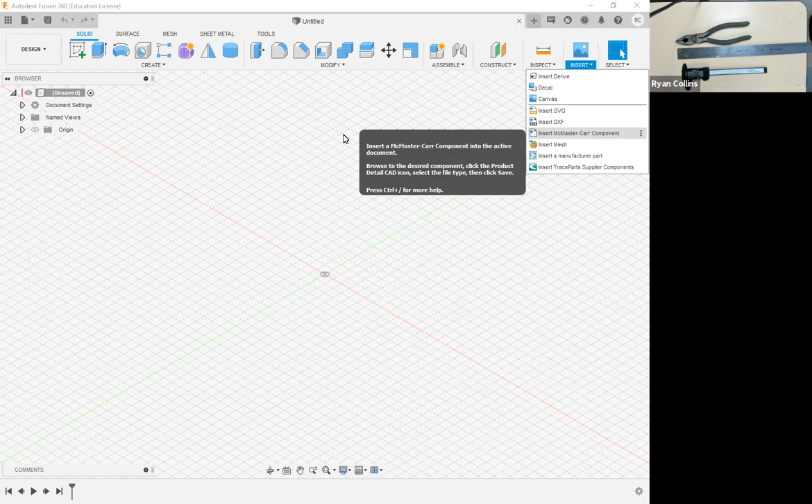So if you needed specialty parts that you are modeling off of this, they'd be here next day if they have it in stock. It's pretty great. This is the exact same layout you get on the website if you opened it on any browser. But within here, I can say, hey, my project, I want to use certain screws. We'll say socket head screws, threading size, inch or metric. I'm going to go metric because the model we're working in is metric.

You can choose your materials, size, and so on. We'll say a standard size for now, M6, standard pitch, sure, a 10mm screw. I'm just going through a few things to see. So you can use your standard selection feature, filters and all that. And who wants to use anything other than stainless steel, because it's shiny and it holds up well.

So what you would do, once you finally find which one you really want to use here, find your part, highlight it, and here there's two separate ones. Just double check, one says stainless, one says still stainless but it's got a black oxide coating. Don't need to know all that stuff specifically, just that there are two options here.

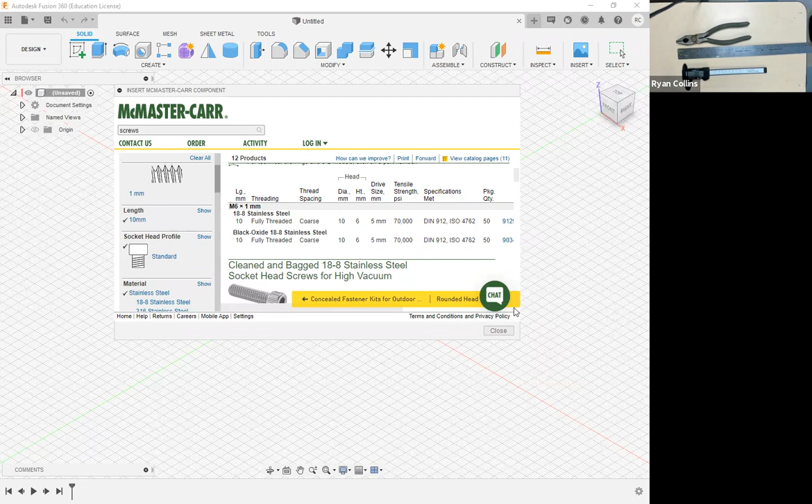Unfortunately the floating window is not as big as it should be, but go over to the hot link, the actual link that is the part number. When you click here, you'll see it brings up a tool thing, and this is where you'd order how much you want. Like, hey, $8 for a pack of 50 sure beats a standard hardware thing.

But at the bottom here, you'll see product detail. Sometimes you actually have to click product detail. In this case, we're going to use not SolidWorks. Scroll down, we're going to use Step. There's other formats, they all work fine.

PDF, not so much. Set. SolidWorks would be a direct word for the actual SolidWorks program. We're going to use the last one, Step. Select there, press download.

Now you don't have to go about modeling hardware itself. If you want to make custom hardware, more power to you. Some components would actually be machined with threads and such, but if you're just doing fastening hardware, there you go.

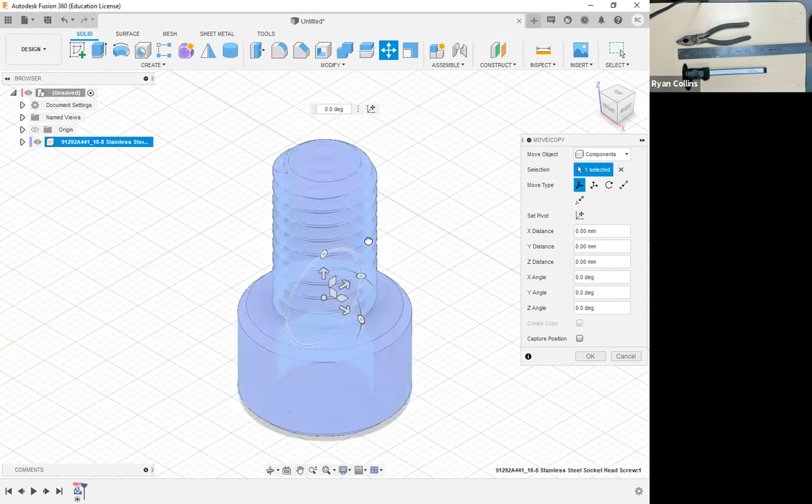In this case, it would come into the model just like if you're bringing in a canvas, and then you can orient it however you need. If you wanted to have this oriented to the side, sure, we'll do 90 degrees. If you need to rotate it, whatever, I wanted that -90 so it's right in front of my face.

It'll come in as a new object. You have your standard options here. If you want to have it lock in place right there, sure, capture position, great, click OK.

Now that is a full modeled component, not a mesh. This is a solid. So if you wanted to play with this model and actually modify it, make it your own or something, more power to you. But now this is a direct solid model within your project.

And it comes in as a separate component, so you can snap it to locations with a joint tool. You can manually bring it in place too, but if you just wanted to plop it in somewhere, there you go. So that's a really effective way of not having to model everything, but also being able to just drop in parts that you can actually order if you needed to.

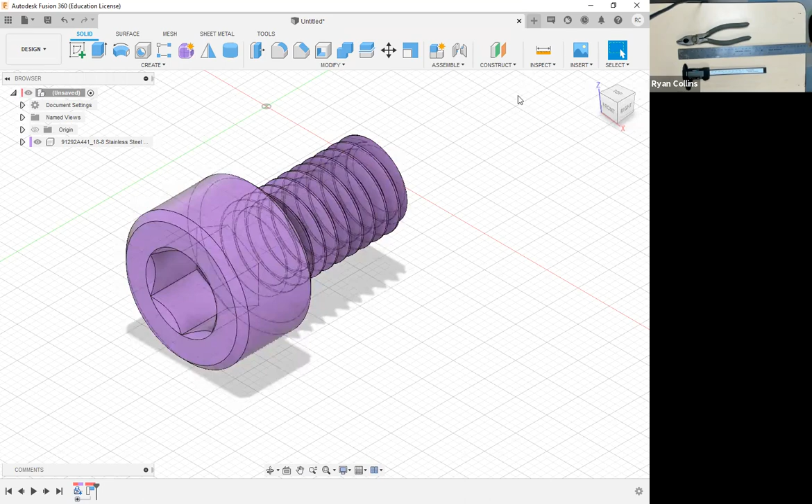All right, so super good there. We'll swing back to that as we get to the rest of the actual project. Oh, nah, don't want to save. There we go. Okay, so the one we're going to use tonight is, I'm going to model a pair of pliers.

So where do you start? Well, where do you start with anything? Now you're trying to model something that's more complex, not quite as standard. Again, I like to use just a bounding box. I just like to create a sketch that's as big as my largest dimensions, so it just kind of plops things into place for me. I don't have to really deal with it, or at least it gives me a frame of reference. That's what it really comes down to.

So first things first though, don't forget, save your project. That way you don't accidentally forget what you're doing.

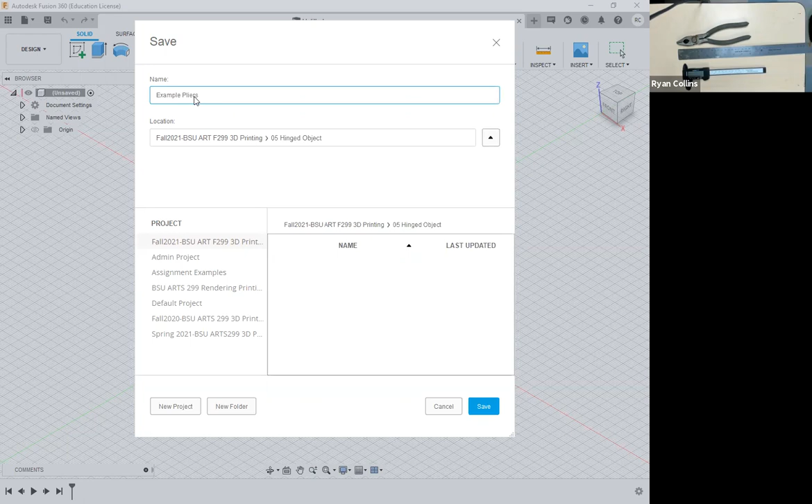All right, so let me start a sketch. Flip floppity flip right down onto the bottom. I'll start with a center point rectangle. Tab over, 210 by, what is the largest section here? Oops, wrong way. Roughly 55. Cool.

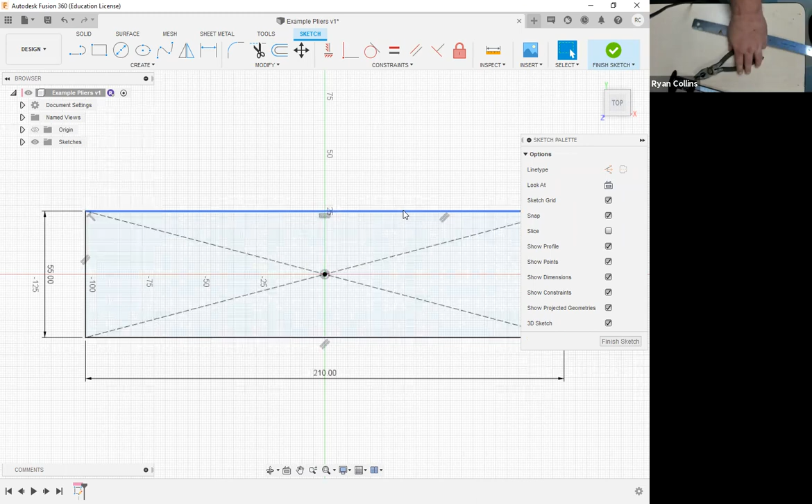Okay, now I'm going to start that as a construction line. I should have started that way. Press X after highlighting. Great.

Now, before I move on, I do want to throw down some other general reference points just to help myself out in the later model. One of those is, now my rectangle here is centered exactly in the center. It is not centered around the joint or anything, so I'm going to just place some points to help myself out later. So right there, about in the center is, yeah, right on about 50 millimeters. Again, good part about using imported tools, they're probably made with metric sizes, so hey, metric rule works well.

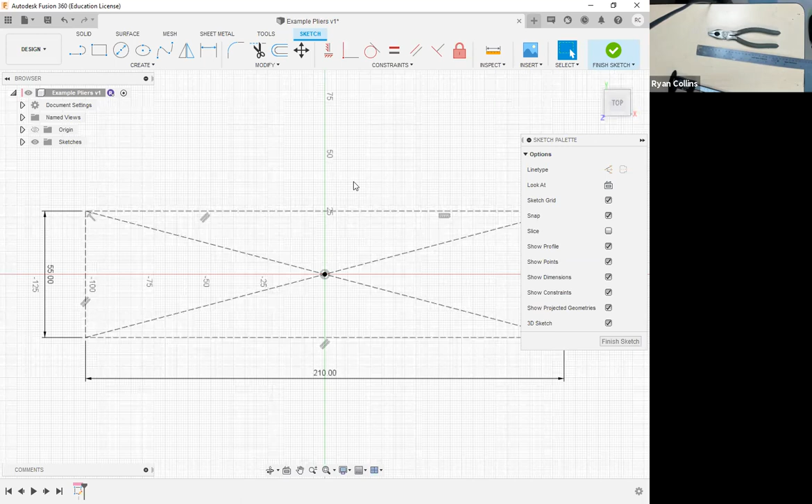All right, so I'm going to start, and I'm going to work from right to left because brain. Now, I didn't actually measure where that's going to be placed. I am going to measure, however, how big is that inner circle there. That looks to be about 12 millimeters. Yeah, so I'm going to just cite that as 12. But like I said, that circle is actually, what did I say, 50? It actually looks like it's actually closer to 48. Okay, so how you can put in reference dimensions is...

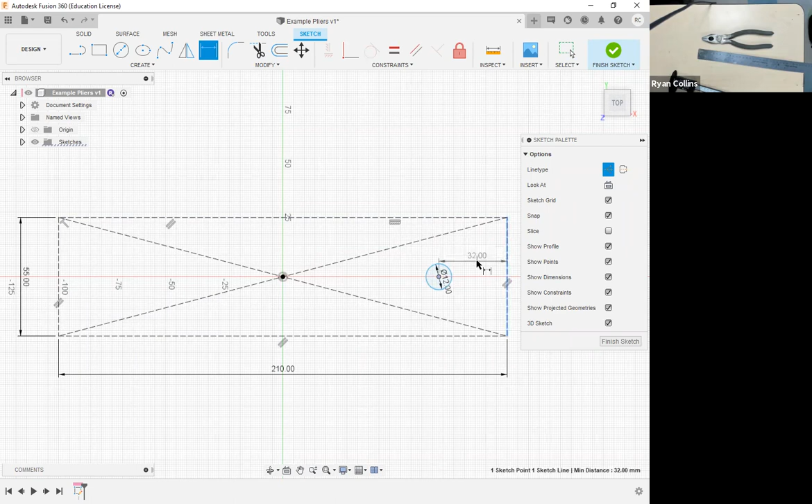In your sketch dimension. Great. This is what you'd usually use for replacing sketches or replacing dimensions, things like that. You can also use your sketch dimension to actually locate stuff within your drawing. So let me pull down to here. All right, so using the dimension tool, sketch dimension, click there or just press D. If I click in the center of the circle that I just drew, and then to the side here, you see a little reference line comes up.

Click there. This is how I can actually put things in place by dimensions rather than having to measure things out and put lines and all that first. So that was 32 millimeters roughly from the center to the end of my pliers. So type in 32, that snaps that over into place. Super easy to work with that way, just to give yourself some reference points. So I'm going to turn that into a construction line as well, highlight the circle, press X. There we go. Okay, those are my rough things I'm going to work with.

I just wanted a general size, and then where is the center of my pair of pliers. From there, I'm going to start a new sketch, so finish this one, go ahead and label it 'pliers reference,' that works for me.

Great, okay, now let's start working on the rest of this stuff. So like I said, one of the things you want to do is, well, not going to worry about trying to model the whole thing. I'm going to model half of this, and then I'm going to use the mirror tool to flip it. There's no reason to make this harder for yourself.

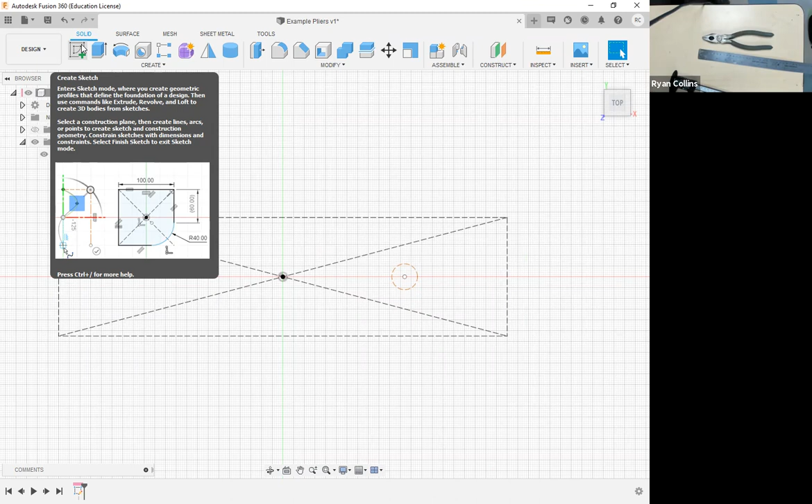So let's start sketching this all out. Now, yes, you could build this with a selection of other parts, random ones there, one second. All right, so I got my center point, got my general reference size.

Great, so let's start measuring this stuff out. You can use calipers if you want, you can use measuring points. Something like this, I like to start with that central location, I like to start with that center hinge. Use my calipers, measure out the round thingy. That is measuring out to, we'll call that 24 millimeters. Great, all right.

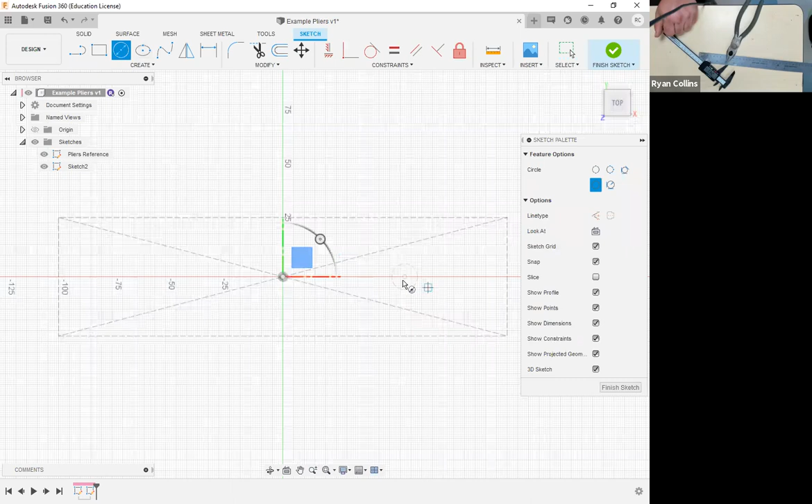So let's start the sketch on the bottom, center circle, right smack in the middle of there. That was 24, great, so that's the outside. How large is that inside? Well, I already measured that, but we'll do it again. It's hard to see that. That was 12, 14, what did I say? I don't remember. No, there, it was 12. Great, okay.

So one of the things, how do you start defining any of this? How do you start defining these pliers, this wedge, all of this? Well, just start drawing. Start really basically with anything.

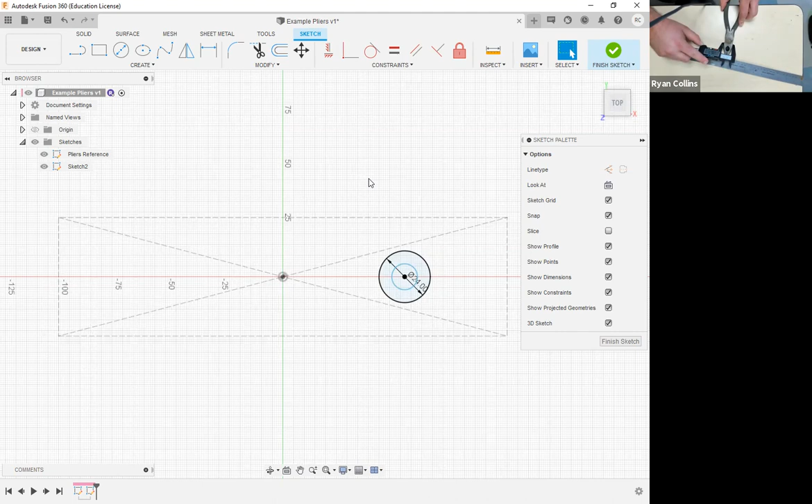Start from a point. For one, I know that the pliers don't stop at that circle. They're actually a little bit larger. So from the outside there, that is 26.8, probably more like 27 millimeters.

So from there, I'm going to start a center point rectangle. I am going to do this as a construction, but I know I want that top to be 27 wide. And then I'm just going to snap this to the side over there.

Now for right now, that sketch underneath is kind of starting to get a little visually confusing, so I'm just going to hide that for the moment. I already got my center point, and right now I'm working on this stuff. So that's how tall that's going to be. And we're going to cut these notches and such in a moment, but for now, let's go ahead and work on the rest.

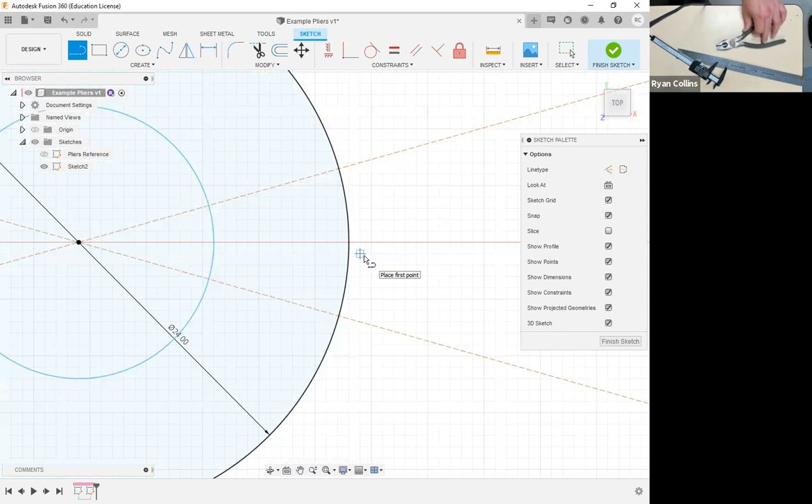So from here, I'm going to start just a line from the edge. So let me zoom in. I'm going to start actually making half of the pliers here. So I'm going to bring cursor to the center and just start a line going straight to the end here.

Great, center is selected. How tall is one of these spots here? That is about 3.4. All right, so now is when you got to decide which side am I building. Really doesn't matter, so we'll say we're going to build this upper one.

So moving from there, all right, that is 3.4. I can type in 3.4 and then I just set my angle.

Now this is sometimes the tricky stuff. Well, okay, how do I figure out where that point is? There's definitely a wedge there or something. Now, if you had a protractor so you could easily figure out that angle, and I don't have one right now, so instead what I'm going to do is kind of draw an imaginary line to where that point is.

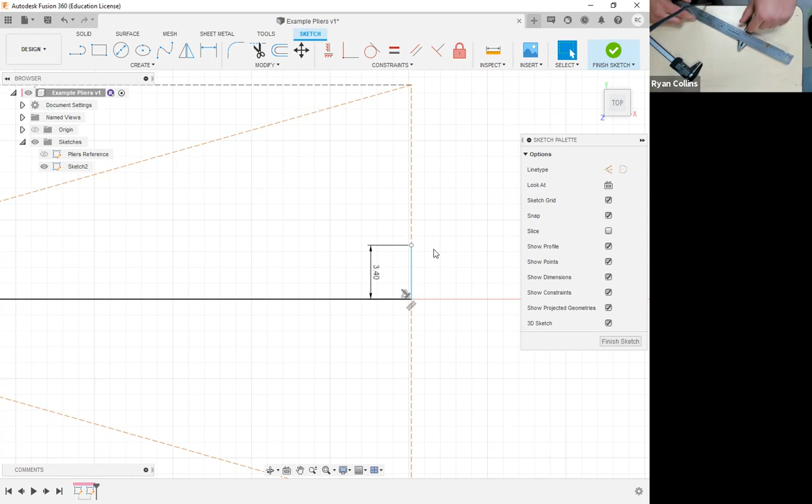Or look down, or if you have something that's a little more pointed, you can still work with it that way, and kind of just figure out where in the center that is, which really it's about in the center of the plier cutter there. So let's measure to that, roughly in the center. That looks to be about, I don't know, 27, 28, sure.

All right, so this would be where I could draw a line to, right in the center. I think it might be easier to just draw backwards, meaning I'm going to start a construction line, draw back 28 millimeters, and put it right there. So now I just have a point right there. Now I could have probably done this with the dimension tool, but I just drew a line there. I can always delete it later, but for now, we're going to do that.

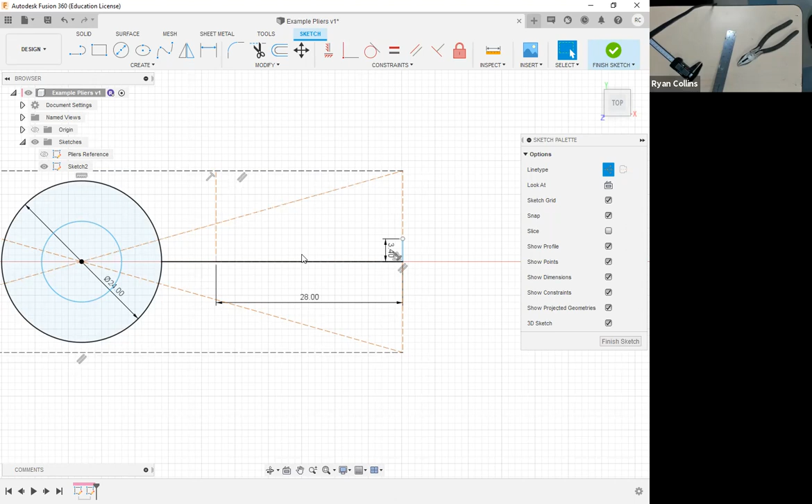Still on construction line, I'm going to go from that point up to the top. There we go. Now I can go back and delete. If you have multiple overlapping lines, remember you can delete them by first mousing over and then holding down the selection key, so left click. Now it brings up this little checkbox. Now I can mouse over which one it is and select that one, then delete it. Really, it's just an easier way to work sometimes on that.

All right, get out of construction lines, straight line. There we go, just so I can make that little notch there. Now I'm going to draw straight back. Makes it easy enough.

I'm going to draw to the center there for now, or looks like I should just might as well go ahead and draw backwards a bit. I'm just going to pick a spot. Doesn't matter at the moment because I'm going to figure out how to cut that up here in a bit.

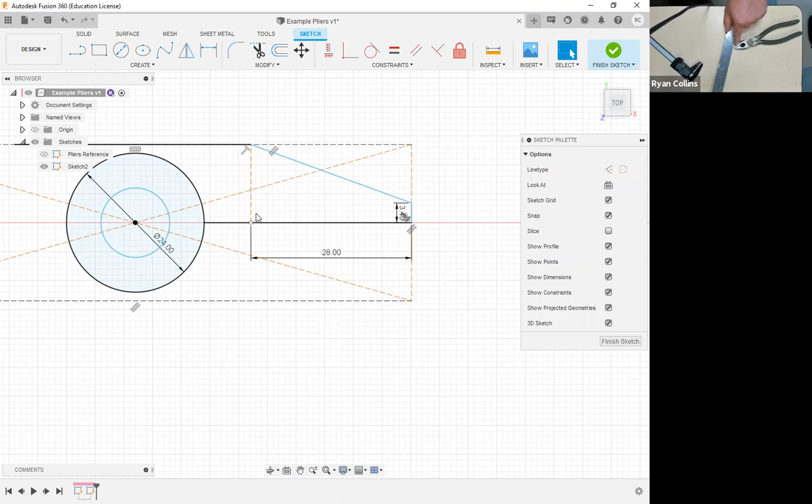So I got that part. Now I need to really decide some of these other areas. Now, I'm not going to bother with the notches just yet. Right now, I'm just trying to focus on getting this thing actually modeled out. So we can build out the notch here later, we can build out the teeth later. These are details. I'm trying to get the major parts here.

So the next thing is I want to make this notch. The reason this notch even exists is because when you open and close, if this didn't have the notch there, the pliers wouldn't be able to open as much. You see how it opens and closes there. So that means I need to figure out how to do that.

Honestly, this would be the kind of thing where you could figure out angles and all that, or you could cheat and just say, let me measure the size there. That looks about 10 millimeters. Cool.

So the size there is 10. Let's draw a construction line from the center here, straight up. And if half of 10 is 5, repeat a construction line right over, and I want that to be 5. Great. Same, I want that one to be 10. Great. Now from my center, oops, that wasn't supposed to be a construction line.

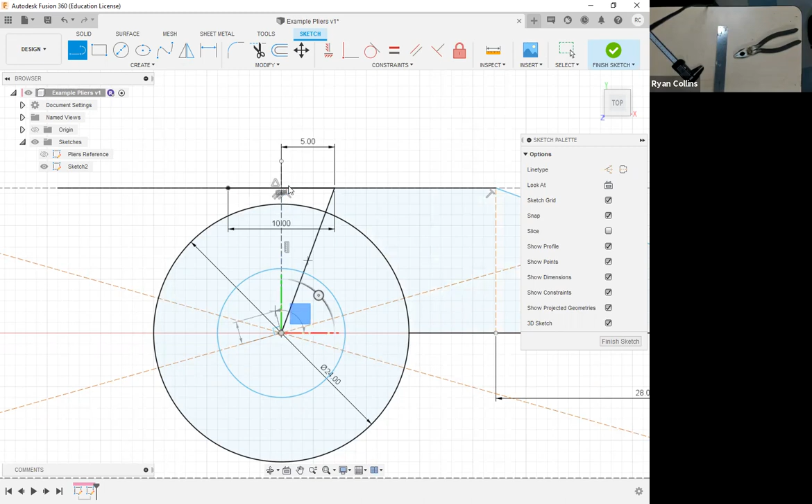So now for my center, I can just draw over to those points. Keep that line. So now when I zoom out and I mouse over that profile, you can see I'm easily building out that section there.

So yes, if you have specific measuring tools, of course you can make more accurate measurements, but we're also working with what we have. We have okay-ish calipers and decent rulers. That's what we're going to work with.

There's some trimming work to be done here in a bit, that's all right. But now, since I got to that point, how far is that little notch there? Looks like it's about... now one thing on here, if you note, it is a little flat, so it actually comes to, you've got a nice, like what would probably be done with a fillet or a round there, but here you got this little point.

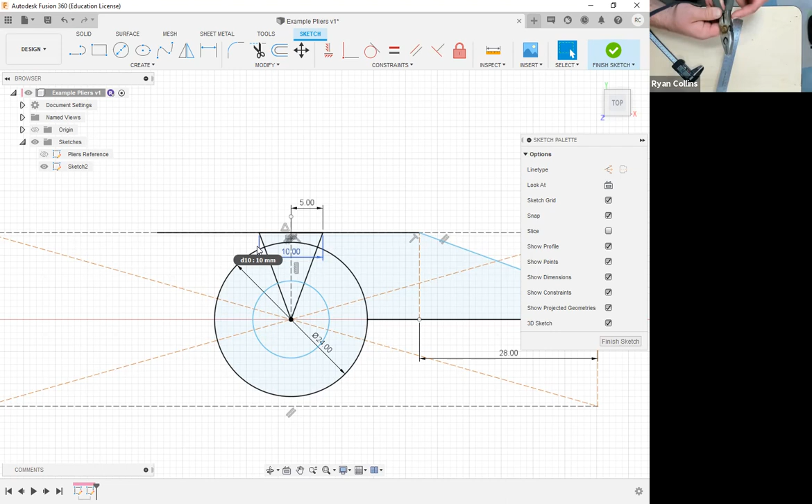So I'm going to measure to that, and let's call that 10 millimeters again. Okay. From there over 10. Match up.

Great, now this is going to start getting confusing in here, so I do want to select and hold, and I want to get rid of some lines here just because this is getting a little busy. Select that one and let's delete that one. That's fine, this is a construction line. That's okay.

That one works, that can stay. I'll rebuild this line here. I was just throwing a line in again real quick. Okay, cool.

All right, now again, how do I kind of build this handle? One thing to remember though, I just motioned to this handle, but I'm building the top plier. Don't forget, they cross. So if you're building scissors or anything like that, if you're making it left and right instead of top and bottom, and you're building the left one, make sure you build the right handle. The parts cross, so double check that.

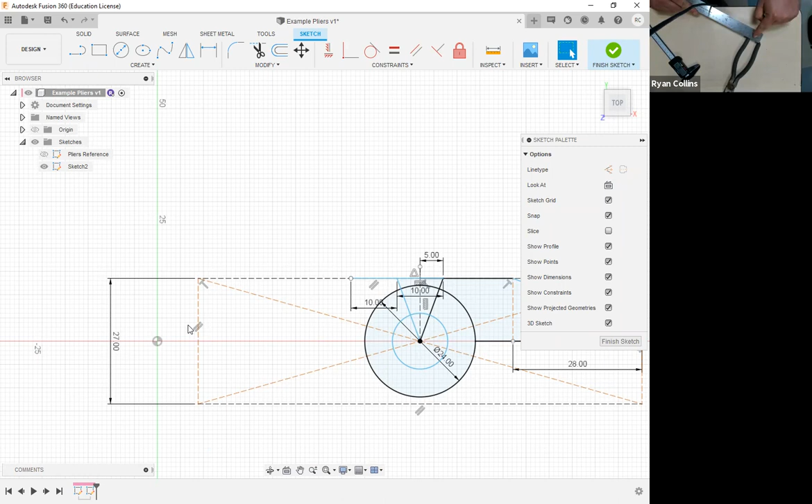Easy way to start on something that is much more organic rather than something with hard lines I can really measure - well, let's first establish how far apart are these. That looks to be about 20 millimeters apart. Great, so that means that my handle should start 10 millimeters from my center line.

So now I'm going to unhide the first sketch, and let's do another construction line. Remember, I'm going down, so 10 millimeters down. Snap to there. Great, got a point. Okay, that all starts to come out.

And this is where I already realized I messed up. I modeled the top half of that part. That should have been down in the bottom. But that is a pretty easy fix.

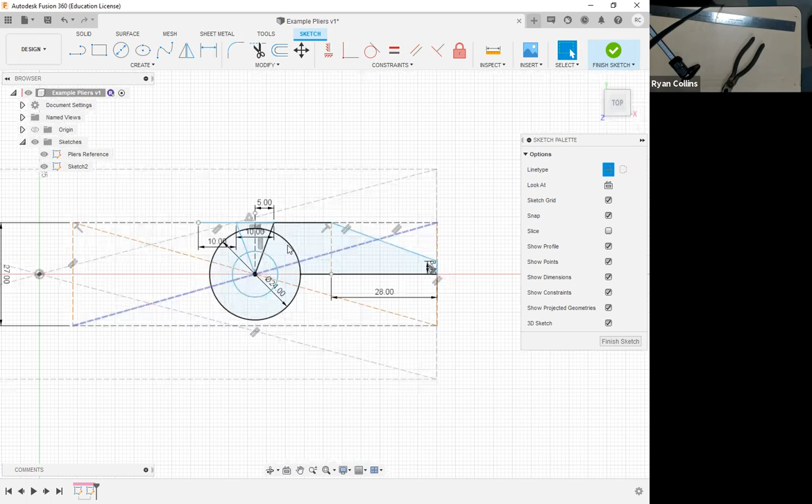What I can do is just extend or replace this line here. So I select there, another line, just make sure it goes through. And anytime you're getting close to something - or better yet, I realize this is a construction line, I'll change it afterwards.

If I'm trying to get that to run as an extension of an existing line, you can see as I move around here, it does want to snap too, but just to ensure that it does, if you mouse over that center point, a shared point, and then continue downward, it tends to want to snap into that location much more readily.

Or of course, if you snap to there and just take note that it is, in fact, 110.3 degrees, well, that makes it easy. Lock that in. Oops. Delete one of those. I have to do this. There we go. And then just snap down.

There we are. So this is just fixing what I messed up there. All right, there we go. I can start to mirror some of this stuff later when I go to work on this. That's fine, okay.

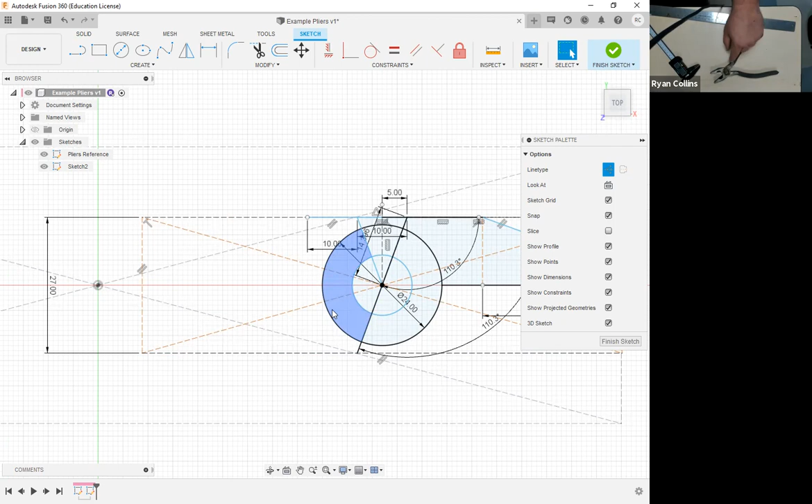So now I've got what will be... getting confused on which way I'm turning here. All right, so I've got a starting point from the top here that's going to work downward. I've got to model this out, and it's got to come to here.

So this is definitely some of those areas where you're going to kind of have to fudge some of the details a little bit, because it's really difficult to get something like this exactly accurate with the tools we have. So the main thing is you're trying to get the details you can accurate. The rest, yeah, get it to work.

All right, so this would be where we'd start a fit point spline right after I build the base on here too. So I'm going to continue that line out from the back.

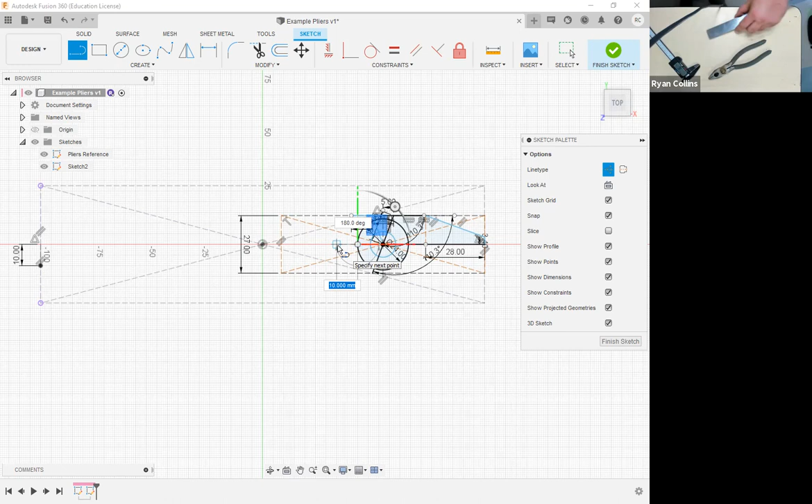From that center hub, that's about 15 millimeters. Snap that right to there. Great, I think that actually did a construction line again. There we are, okay, so I needed it to sweep upwards and then down.

Now, you can get a pretty decent estimate of these measurements here by just figuring, all right, I know that from the back of the pliers to here is 140. So let's say right about there, which is 60 from the back, and obviously that would be 80 from the front. Had the math right real quick.

So right about there, how wide is that? It's definitely beneficial if you actually put a couple of little marks if you can. So great, that's what I'm actually trying to measure to. And in between there, yeah, it's about 30 millimeters. Great.

So construction line from the back to 60. And then again, what did I just say? That's 30, so 15. There we go. So you start drawing some of this stuff out just to give yourself some reference points. Okay, so now I have a couple of reference points.

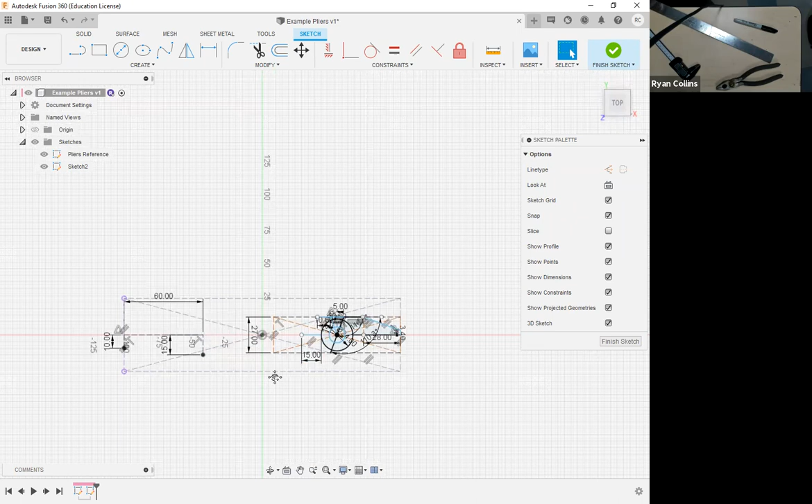Now I can really start to sketch this out. So select fit point spline. I start from the back here, which is here at the back of the pliers. I'm going to draw up to that point, and I'm going to draw down to that point.

I can adjust these. Again, this part is where it's going to be not as exact, but it's going to be pretty darn close. So there we are, great. That's pretty good to where I want it to be. Now the end is going to end up square, and that's fine, I'm going to fix that later. But that'll work, okay, great.

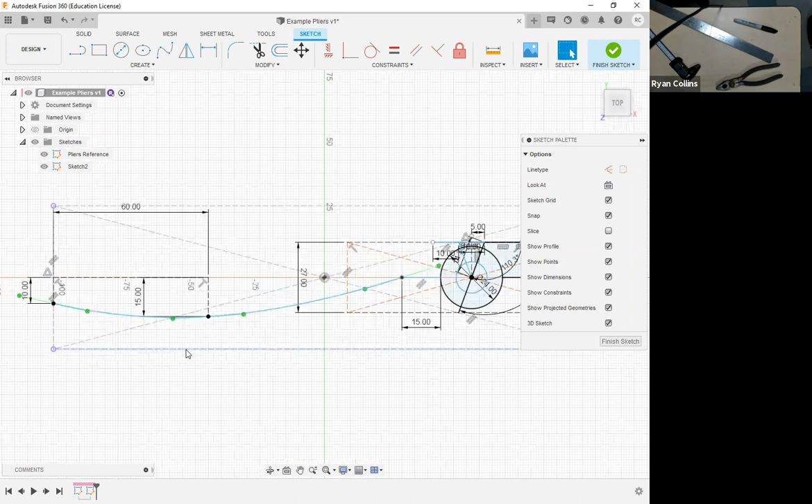Now I can decide, well, how thick is this? Yes, with the handle on there, that's all right. That handle, it looks to be about 12.5. Okay, now I can use the offset tool.

I don't necessarily want that other part, but I can trim it off afterwards. That is negative 12.5 because I'm going the other direction. Matches up pretty well to the end of my box that I drew out. Yeah, that works, good, okay.

Now I can complete this line over here, a straight line from the back, straight over to where it intersects with my offset line. There we are, hit enter. Now I can trim off those little bits.

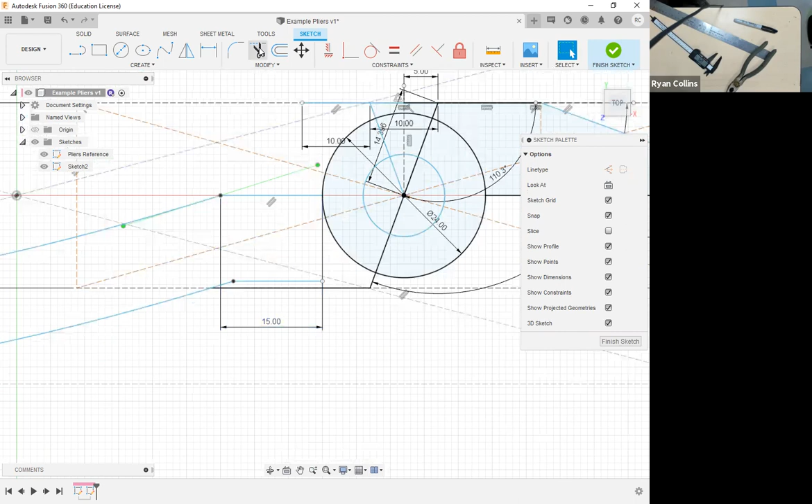Yes, I'm going to get a warning. Yes, you messed with the constraints, blah, blah, blah, blah, blah.

All right, and then back here, this is where I could probably pretty easily create a circle. So what I'm going to do is create a circled end and then modify that. So how to do that? Well, how do you draw between two ends? All right, well, we did that before, but I want it to stop at the end of this box. So what I'm going to use is, under circle, a 3-point circle.

So this is where I can, instead of starting at these points or anything, why is it—it keeps stopping. There we are. I'm not sure what's going on here. Cursor keeps stopping, all right. Hold on a moment here. When in doubt, save. Just hit escape.

All right. Let's try that again. Not sure why it was doing that, but maybe I had too much data going. Still doing it, that is super weird. All right, well, let's try something. Often in doubt, stuff keeps doing just what you know perfectly well it's not supposed to be doing that. Pause.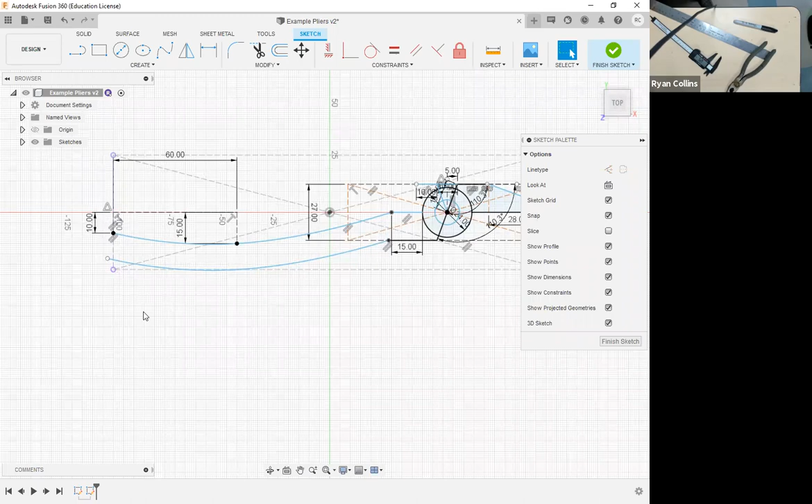Okay, so tried saving and restarting. Let's see where that gets us. So try this once more. Circle, 3-point circle. Hey, it's actually working.

So what I'm trying to do is find a point between these points here. Now, if you can't find something, that's all right. So what I'm going to do is, before I make the 3-point circle, start a line, press X for a construction line, just draw between these 2 points here. Just let the snap do what it wants to, or what it needs to. Now I have a line here in the center, or a line between these 2 points.

So now when I go to create a 3-point circle, starting here, it's going to be able to find my center point between there. So that's all. Then I can draw out from there, find a point there, and I'll find a point here. So I'm just going to try to make these match. There we are. All right, that didn't work as well.

So Control Z. Other option would be trying out the tangent circles. These basically do the same thing, only they work on tangents. So let's try this. Draw a circle from here, circle to there. Come on, catch up. That's not wanting to let me do it at all. Fine.

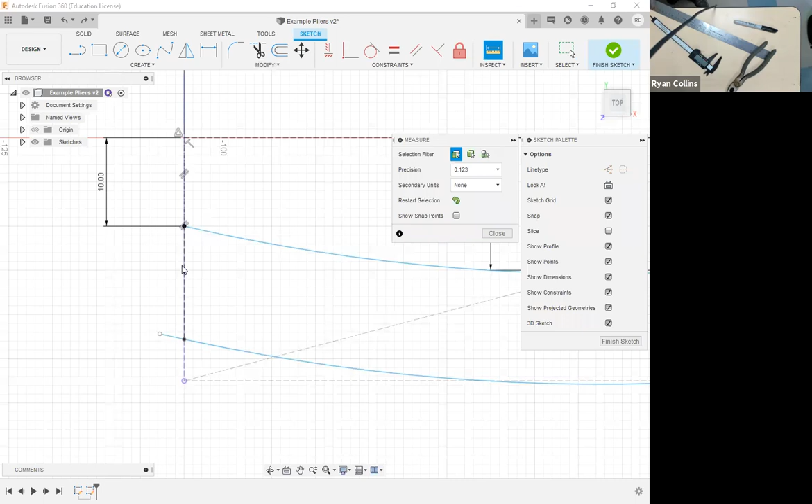Then the last step is measure this. All right, how wide is this? Oops. That should be 12.1, I believe, but let me double check again. I don't recall. 12.8. All right.

So what I'm going to do then, I'm going to create a circle somewhere in the middle, but that needs to be 12.8. Now what I can do is use my constraints to snap this in place. So first I'm going to use the tangent constraint. There to there. That's going to snap the circle over there. Use other constraint there to there.

To my fit point spline. It's not selecting it. Not sure why. Right. Okay, now it's not doing that. Fine. You know what last ditch is? We delete that.

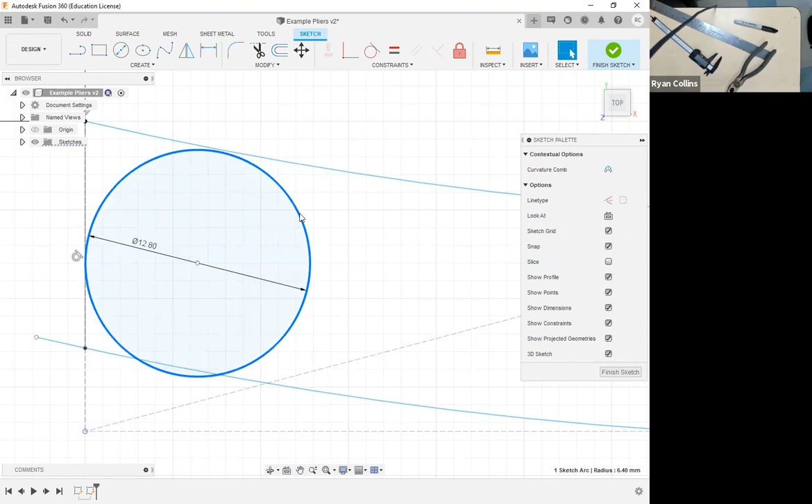I will close my sketch, change that construction line to a regular line, and instead then we'll just use, nope, not offset, the fillet tool. There we go. That makes it work.

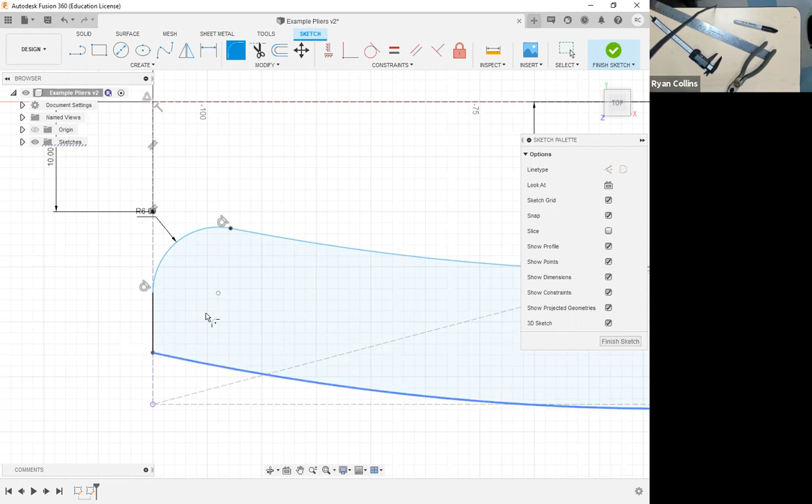So we know that is 12.8, so let's say 12, so let's make that a 6. All right. Again, repeat fillet there to there. Oops. Because it has this little tail, make sure you chop off the little tail. There we go. Now fillet there to there. Same, 6. Pretty darn close.

There you go. So, a couple of tools you tried, they don't work, or they're not working right. Try something else. Okay. Now I have a handle, and I have the head of my pliers.

All right. Now, I know all these dimensions are pretty confusing, but let's work with what we got. Finish sketch. I'm going to hide the first one. We'll just do pliers, side A. Okay.

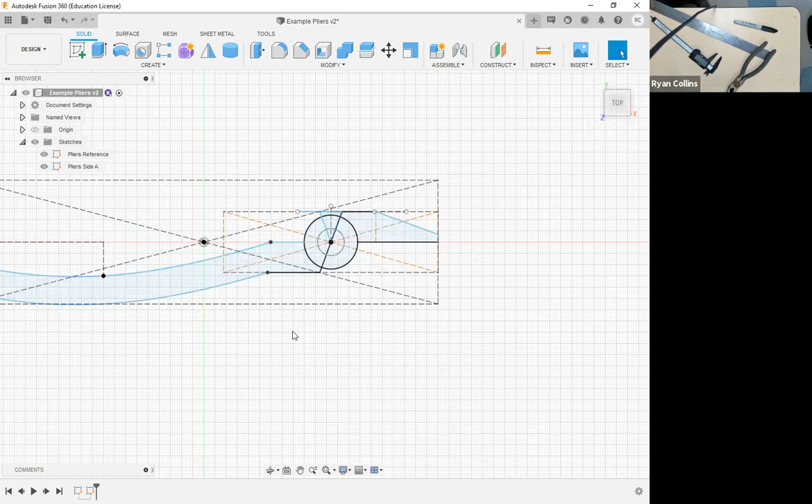Now we get into extrusions and such, our old friend. All right, so how thick is this whole thing? That is 12 millimeters thick. Great. So what we need to do, extrude.

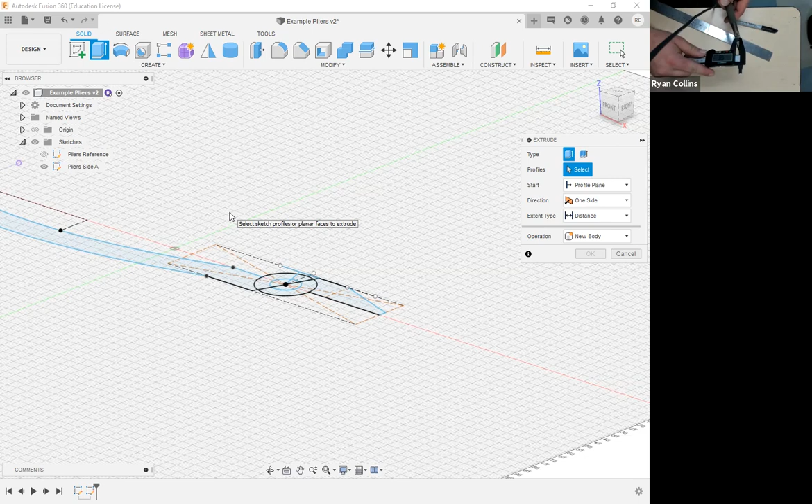Now one thing here, take special note, these pliers, the internal pin is actually part of one of the sides. The other thing is, look between the sides here. The center here isn't a full extrusion. It actually only goes to half. So while the pliers themselves are a full 12 millimeters thick, this center hub here is actually only 6, but it's 6 on either side, and it's 6 on opposing sides.

So the easiest way to do this would be to do multiple extrusions and then join them together. So what I'm going to do is extrude one side of the head, one side of the handle, and then I'll extrude the center here.

So I'm going to select the handle and the head first. Now, just to make things easier, I want to keep everything right on the XY plane here. So it'll be split. Well, if I extruded this to 12, it's all going to go up one side. And that's just going to be more difficult for me.

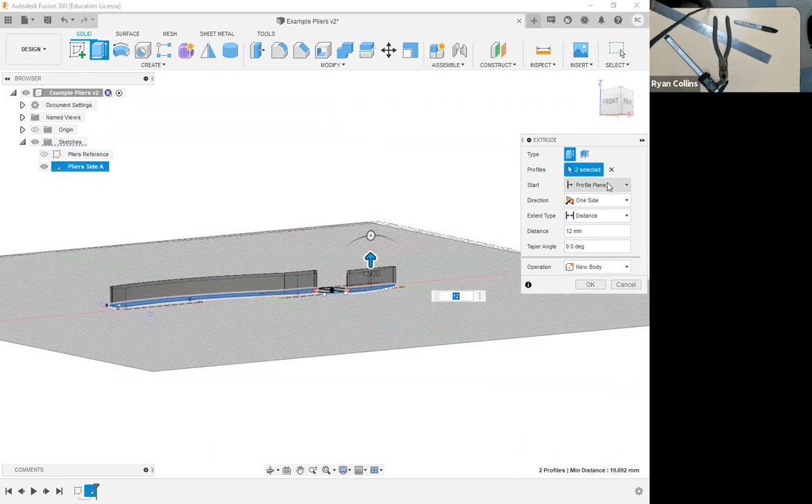So instead what I'm going to do is choose direction on the toolbox into symmetric. And you have 2 options here. Now of course, right now, the default is it's doing symmetric on both sides. I want that to be the whole length. So you got 2 options. If this were leaving it on half length, you'd press 6, and that way it's going 6 in one direction, 6 in the other. Or you choose the other measurement selection, whole, and I can put in 12 millimeters for the actual overall, and it'll be 6 on either side. Just a couple of simple, easy ways to work.

Okay, great. And operation, I'm going to immediately drop this into a new component. Okay.

Now all my center stuff is gone, all my sketches are gone, but I still need that center. Let me open up side A. I'm going to label this piece plier side A.

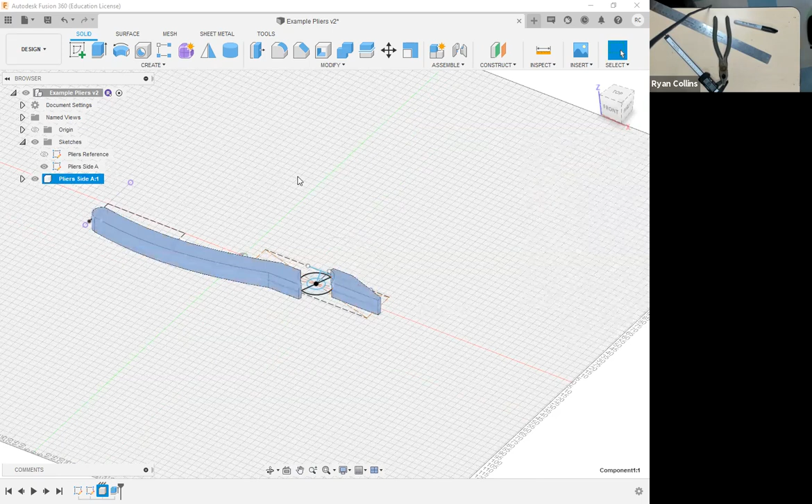So now I'm just going to shift my view so that it's by color instead of appearance. Now I'll go back and extrude again. Which side is this? It has the half on the top. I'm going to go in, select that center ring. You got to pick a few parts here.

There we go. I can either just press in 6 and it'll go up to the top, or I could select again, extent type to object, and just select the top of one of these, and it'll snap to that too. Now I'm going to leave this internal piece hollow, just because I want to actually drop in a screw here, for example.

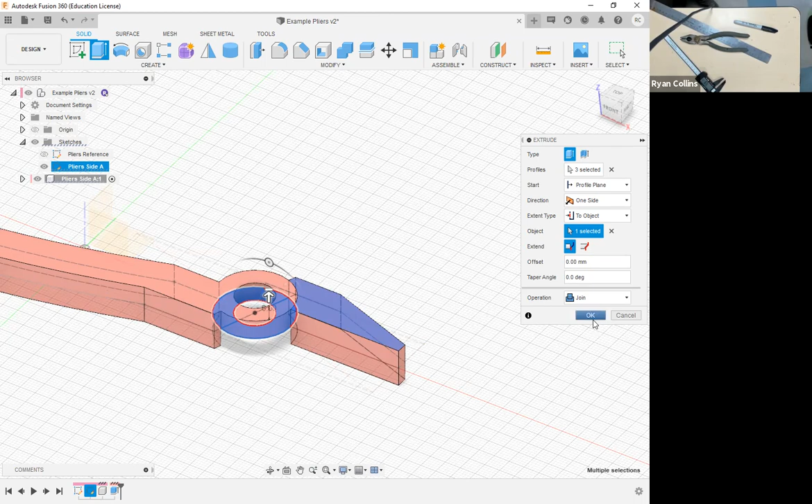But there we are, we got to that part. Great, I'm going to let this join. There we are, hide the sketch. Now I have half. This still needs a lot of development work, but we're getting there. Now, what I could do...

Is go back, sketch, yada yada yada. Because a couple of problems is going to be, if I try to mirror this directly, I'm going to end up with something I don't want. I'll show you what I mean here.

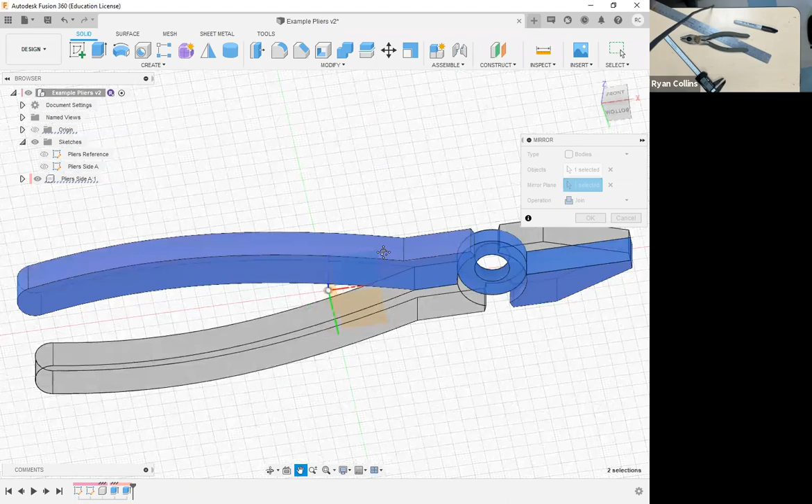If I select this whole thing, and then mirror plane, I'll just use the mirror there. It mirrors it directly. So I still end up with a void underneath. That's no good. So instead I can do, I got two options.

I can mirror the sketch itself, which can get kind of problematic, but plenty useful. Or, because effectively this isn't a mirror, this is the same part rotated. And this is why I haven't made any of the details and such into the pliers yet. Just realized that that cable was in the way.

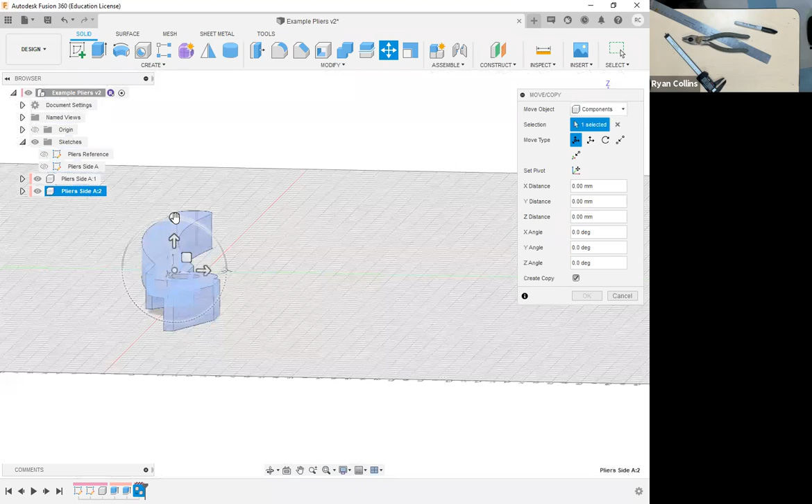Instead of mirroring, what I'm going to do is select the whole thing, select move. But what I do here, I want to actually say create copy. Select that box. Now I'm just going to take that part and rotate it 180 degrees.

Now that didn't drop it into the exact place. I should have used the center point over here. So what I'm going to do, I'm going to cancel this. Again, move.

Whole thing. I want to set my pivot though, right smack in the middle here. But I actually want it in the middle of down here. So just like using the joint command, if you have difficulty selecting your point, if it's in like the middle of a floating spot, now there is a little X and it will snap over there if you're careful, but sometimes it's difficult. If you mouse over a plane around like a hole or something, press and hold Control, it locks into that plane and it's a lot easier to snap it in place.

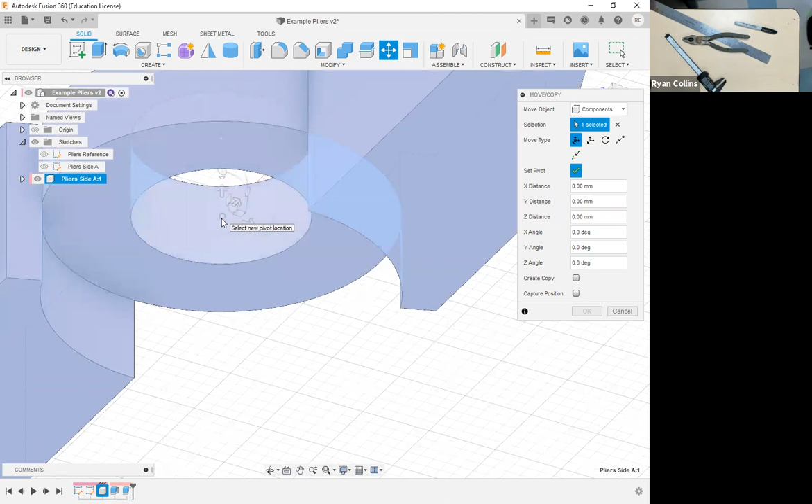Let's see here. There we go. Pivot is set, uncheck. Go back to, oh, not front, right. And now rotate, oops, I forgot to do the... go ahead. I forgot to hit the create copy.

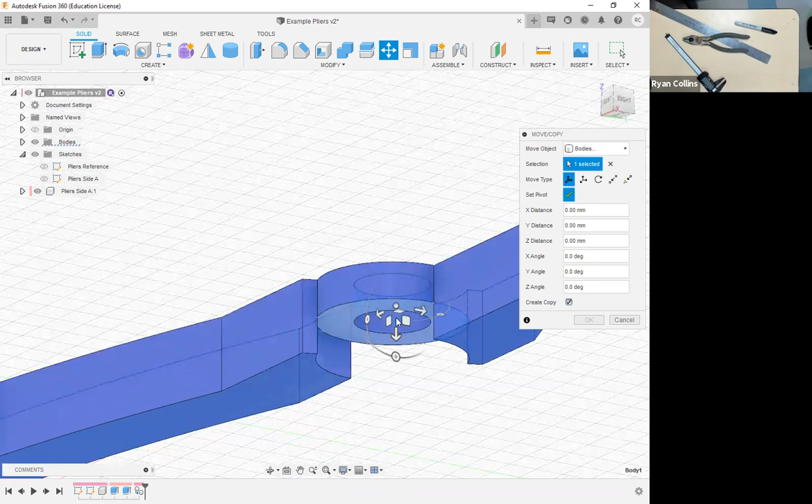Do it again. Come on, snap in there. There we go, okay, now we got it. So I set my center point, my pivot point right to the middle, uncheck, create copy is good. Type in 180 because it's just easier than trying to find it.

That's what we want. So instead of the mirror and having to make duplicate sketches and all of that, now I can just rotate it around. Click OK. Now it did drop that into the original body here.

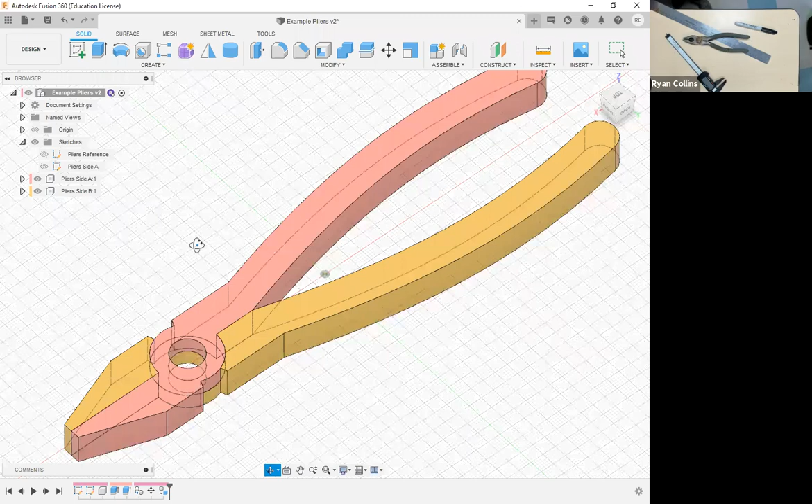So what I want to do is from there, I'm going to throw that out as a new component from that object, from the body. Click OK, so it's just a separate component entirely. Label stuff, label it and it'll make it so much easier.

Okay, those are the basic parts there. Now what we want to do, we can add details, all of that. Easy stuff on here. Let's play around with the fillet tool, see if it'll give me a full round. I'm not sure if it'll let me. Let's try over here. That's got all the way around. Great, and we'll just shrink that, see where it brings me to. Looks like about 5 is the magic number there.

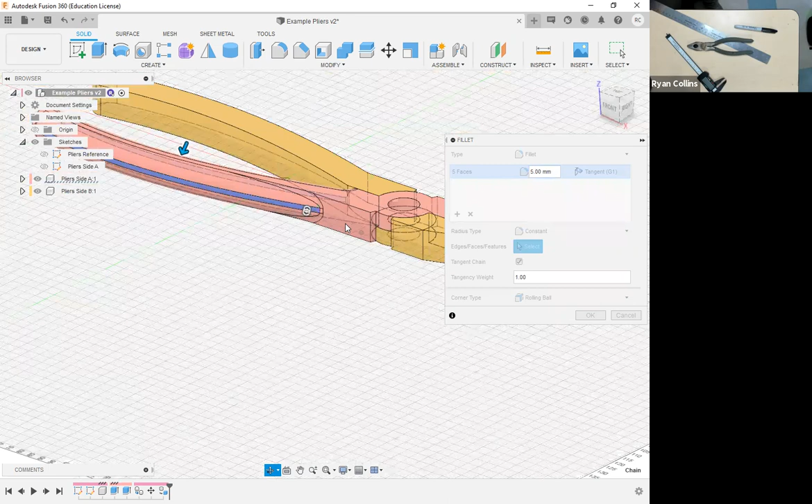Now, something like this would have been a lot easier to do, and I can still do this by going back in my history slider and adjusting this. So rather than me doing the detail work, like adding the rounded end for the plier here, this is what I do want. But what I'm going to do instead, cancel, move the history slider back to here before I made the copy and everything. Fillet tool, all the way, it is all the way around. Great, that was about 5.

Great, hit OK. Now when I go back to current, it's done the same thing to the copied part. So this is what I was talking about as far as complex modeling gets exactly that, complex, but don't feel like you have to know everything right off the bat, right off the start point.

You can always go back in history and add details. Hooray for time travel, at least virtual time travel. You can always go back and make corrections, make changes. And if you have made things as copies or duplicates, that way you don't have to keep remodeling the same parts over and over or making the same changes over and over.

You can alter the original and just have that be carried forward. So for time's sake, let's say we're going to keep working with those details in a bit, but for now, save here, and let's put a detail on this that is with the copied side.

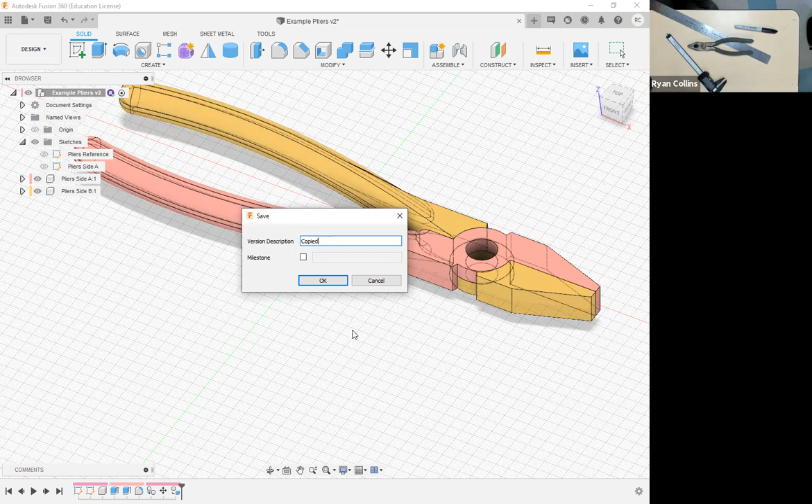So just so y'all know, if you haven't seen it before, adding that detail in when I open up and drop down my iterations, that just gives you little notes underneath. So before, when it was just item created, great, I didn't make any changes to that little box that popped up. As we're getting more complex, it might help you to write notes down. So when you actually go and actively save, you can type in just a little note to yourself and change that in there, and it just gives you a reference point. So if you're making multiple iterations, it's convenient right there.

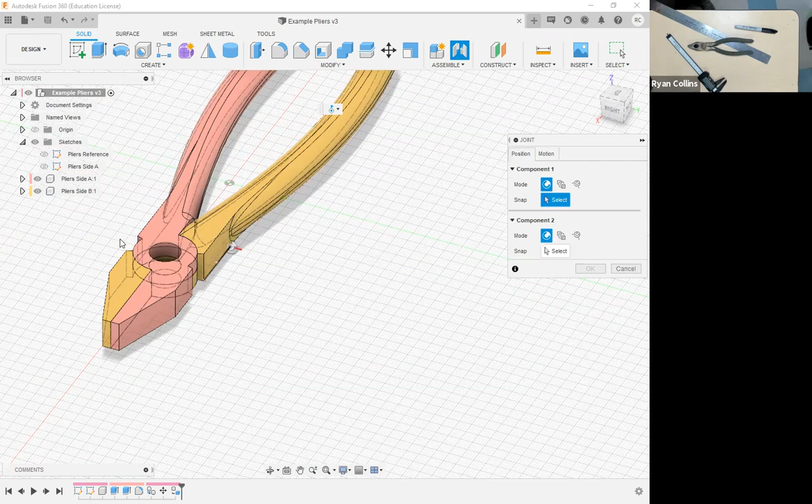There's more complex parts, but we're using this one for now. So the trick is you have your position again, just like with the vessel, and you have the motion you want. Well, this one, I want to go ahead and pre-select revolute, that's the one that revolves around. Now, position, I am not selecting on the top or in the middle here, I'm selecting way down in the middle itself between these two parts. So on the model or on the object, I'm trying to get the joint between here and also in the middle, which obviously on this example, there's a solid part there.

So what that means is a lot of times it's a lot easier to hide an object or a body and then select. Remember that in your component selection toolbox, the first one you select is what will move, the second you select is where it will move to. So if I want one side to stay put and the other one to move, the first one I select is the one that will actually move, the other one will stay put. So I'm just going to go with an A-B thing.

Now hide the first one or the second one. I need my selection actually down underneath, so I'm going to orbit under. And as I mouse over into that hole, my selection cursor will pop up, but it keeps kind of falling away. Now it's snapping in place there now. But like I said, if you're having trouble selecting, mouse over a shared plane object, so like this ring, press and hold Control, that locks the cursor to selecting things on that plane.

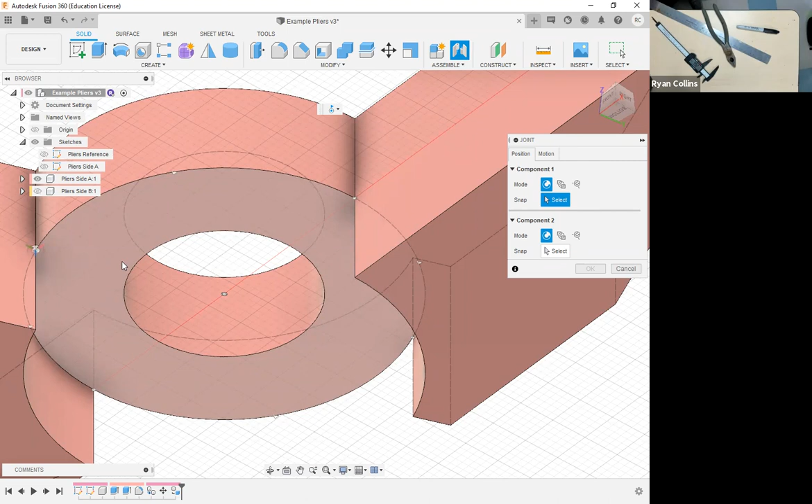Now I can snap over there. Boop, the first object ghosts out. Unhide the second, do the same. Only on this one, I'm selecting it from the top. Might help, especially when you already have things that are shared like this in a tightly shared space, to just hide the first one entirely. Again, snapping to right there. If you can snap to it, great. If not, mouse over the shared plane, press and hold Control, over, snap, unhide.

It goes nanners. Great, that's pretty much what I want for now, and I will put in the details in a moment. Press OK. New thing pops up on your hierarchy tree, joints.

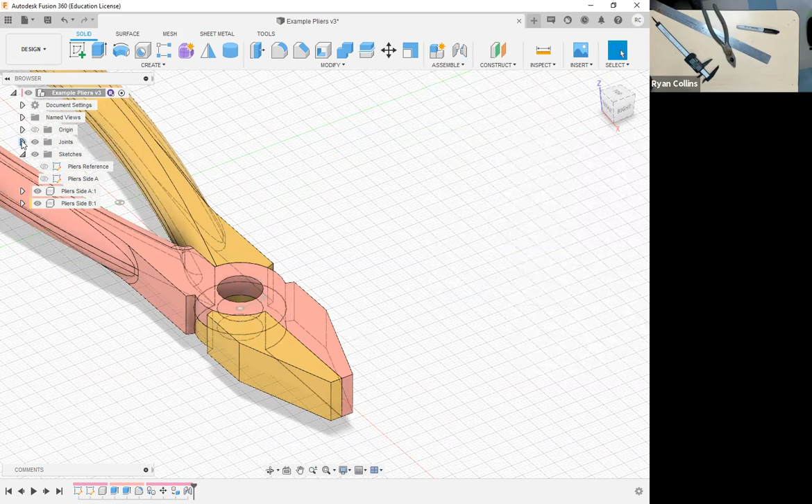If I mouse over the revolve, you have to the side, edit joint limits. This is where you can put in your actual limits. Let me zoom out a little bit.

You'll see these little flags pop up - this is how you can manually do it. Click and drag one of those flags, but first you have to activate the minimum and maximum. One is the minimum, the highlighted one is your zero, and the one that is not is the maximum. Let me grab that one and move it out.

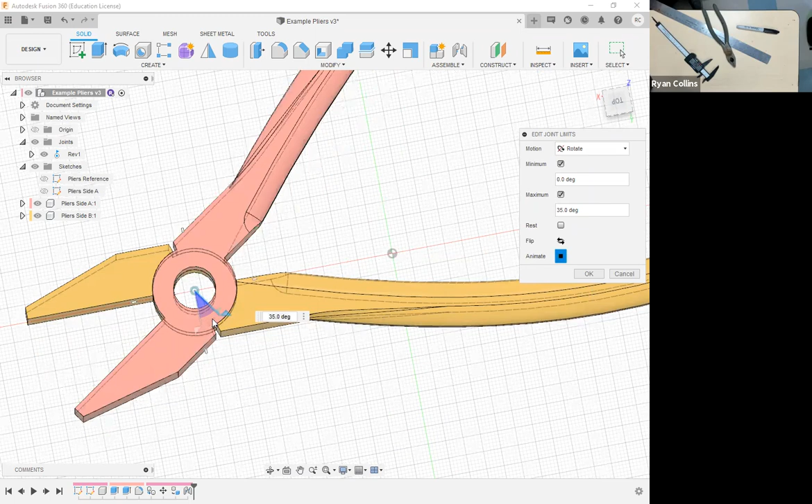That's fine, but one of the things you want to keep in mind, just like with the other project, if I were to grab one of these, you should be able to grab and move this on its own. Problem is, if I click and drag, it's moving the whole thing - definitely not what I want. So let me Control Z the position there.

You want to ground one of the objects. So which one did I actually want to have move? Try the animate - well, it's already doing that to the pink one, side A. So I want to ground side B. To do that, right click on the component and select the second option there: ground.

You'll see that pops up on your history slider, and the little pin pops up on the cursor or on the component. What that does is it virtually locks that object, that component, in place, period, end of sentence. It will not move whatsoever unless you unground it, which is just right click and then there you go.

All right, so once that is grounded, now it can't move and you're all set. Now this other part, you can click and drag and it will move within the constraints you set.

Remember that if you open or close or whatever and leave it not in the original position, a new prompt will come up in the top right-hand bar of the main toolbar. It will ask you if you want to capture the new position or revert to the original position. Instead of pressing Control Z or Command Z, you can just hit revert and it'll snap back, or if you want things rotated and positioned a certain way for the display of the model, you can capture the position, meaning it just leaves it in that spot now.

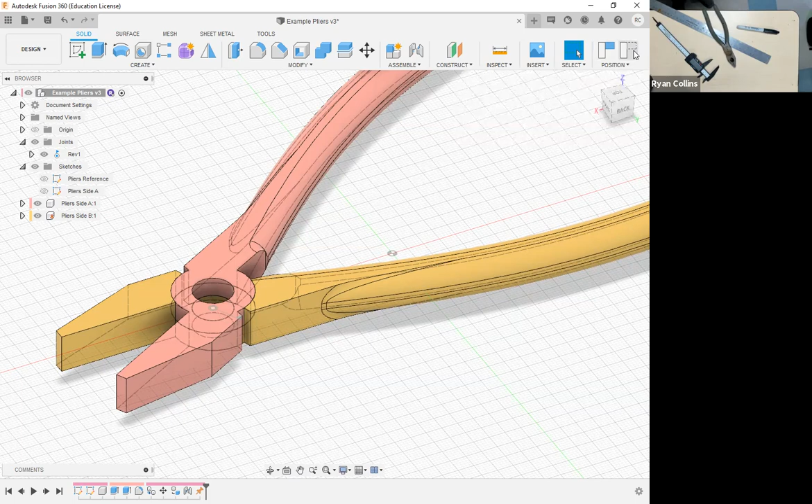But I'm going to revert back. There you go, okay, I'm going to save again. Now that is the joint added, just that way if you're going back through this model, you can see more easily. Okay, got those parts in. Again, I'm going to add the other details and such later, but first I'm going to finish adding parts.

Now, yes, in my original model, this actually has a solid pin in place - I could just extrude a circle into there and done and done. But for this project, we are adding hardware, so I'm going to take a measurement just that way I can work with it. All right, let's see here - that was, again, 12 millimeters.

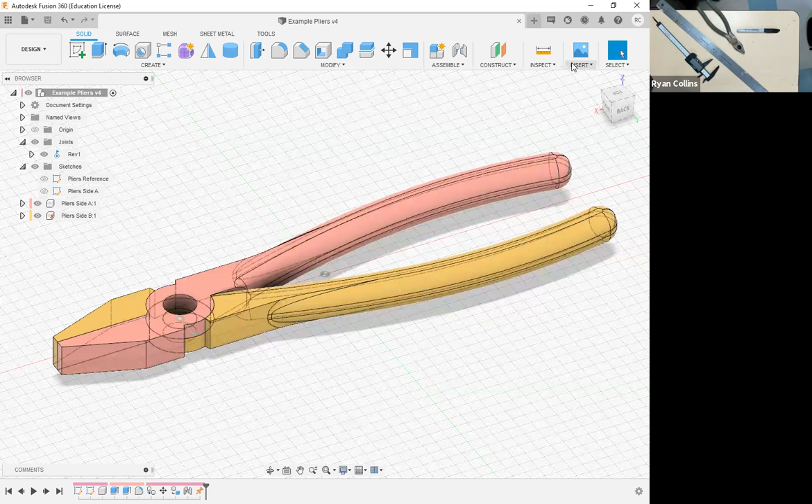Great, so what I want to do now is drop in a new part, a new component from the McMaster-Carr extension. So I'm going to go to Insert, McMaster-Carr Components. Let it boot up, and you are welcome to drop whatever you please into this.

If you find something that, hey, holy crap, they make a platinum coated screw, I want that one - go for it. If you want to buy it, more power to you. I mean, that'd actually be kind of cool. But anyway...

In this case, I want to add in a screw and I will put in a nut. If you want, what you can do is actually thread one of the insides, more power to you. But for reference, I'm going to select a screw. Let's see what kind of fancy screws they have - we'll just stick with a rounded head screw.

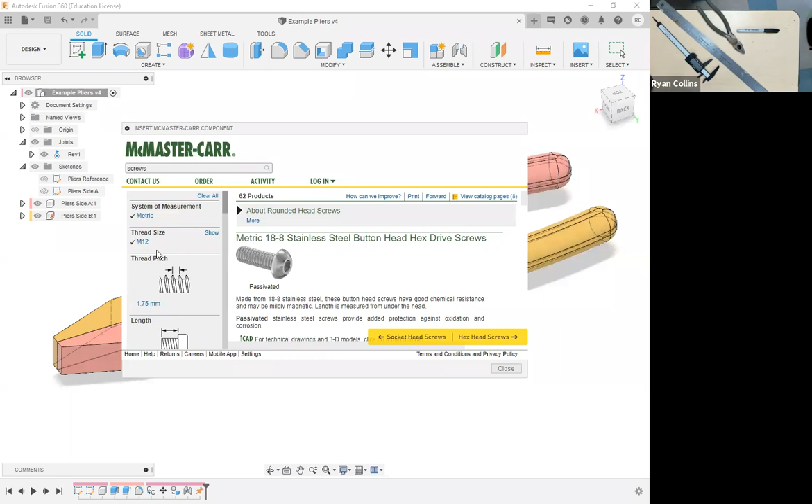Nice, metric. And to select your size, that hole was a 12 millimeter size, so I need an M12 screw - that's why metric is just easier. The thread, that means there's only one size thread, yada yada, but I do need a length. I need this to stick out further on one side so I can put a nut on the other side. This thing is 12 millimeters wide, and it shows me what my dimension is here.

It measures from the bottom of the cap to the end of the screw. All right, so yes, I should have measured the bolt or the nut first, but we'll just estimate - so that's 12, let's say 18. I don't know, we'll figure it out in a minute. All right, there we go.

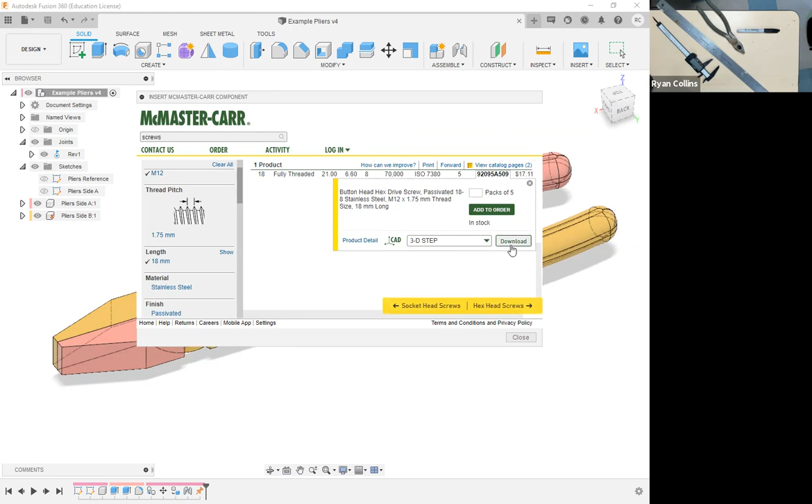It shows me, it already opens up the little dialog box here. Drop down, you want to use the step file - do not select when it says no threads, because that's just for simplifying a model. We want the full model threads, so select the step, 3D.step, download, and bam. It drops it right in.

Now, for what we're doing here, because remember, we're putting this in position with a joint, I can move this just out of the way and lock that in position.

Like I said before, when I move something, that prompt comes up for capture position. You can do that within this box here. Select capture position, press OK. All right, button head screw, showing it's a different component entirely, it's a different color, and it's a new component on my hierarchy tree.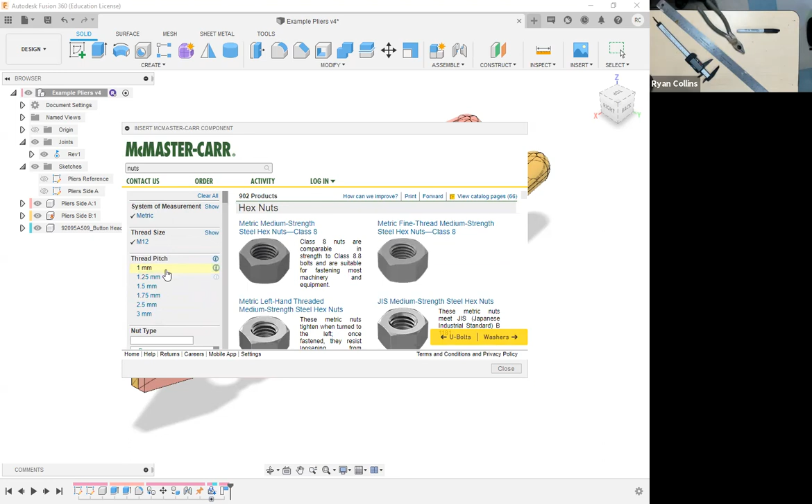I also want to grab a nut for this. So let's go back, open this back up. Nuts, metric, same, M12, and I think that... oh, I forgot that was a 1 millimeter. Thank you, 1.75. Appreciate you remembering that.

And go nuts. You want a press fit? You want a square nut? Whatever, just to keep it simple, we'll go with a regular, boring hex nut. But to make it a little easier on myself, let's say... ooh, titanium. Hey, titanium nut. Why not? There we go. Already giving you an example: it will remember your selection, so you don't have to select that drop down every time.

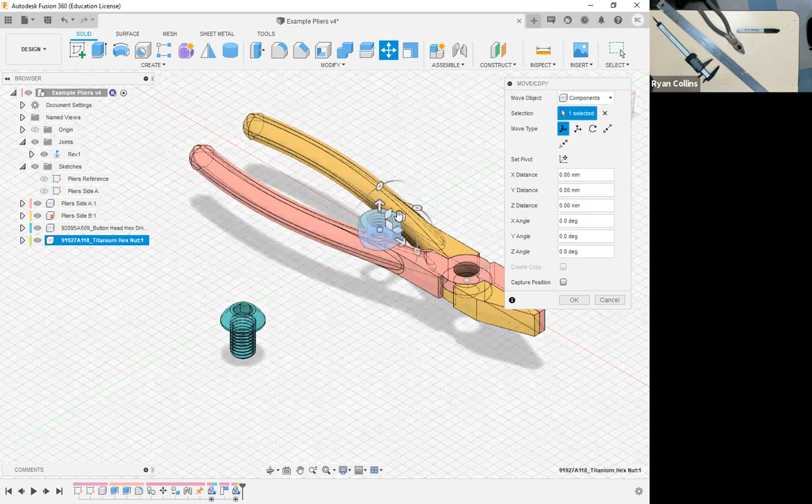Download. Huzzah. Move that out. Now, is that too big? Oh my God, yes, that's enormous. But we'll deal with that later.

Capture position, okay, all right, those are now in place. So now let's put these in place with a joint. So I remember what this does, let's animate just to remind myself.

Okay, so just for grins, or rather to make it a little easier on myself, we're not worried about these two threads meshing together or anything. What I'm going to do is just use a joint command, a rigid joint, and just plop these in place. The more important part is getting your actual hinge, if there's pliers, if it's a box, whatever, getting that in position properly. These we can just drop into place properly.

But what I'm going to do is reference the different components of the plier, the different sides, with the nut and bolt, meaning I'm going to put the nut locked to the moving side of the pliers... or I'm sorry, I got that backwards. The bolt locked to the moving part of the pliers, and the nut to the non-moving side. So let me show you what I mean.

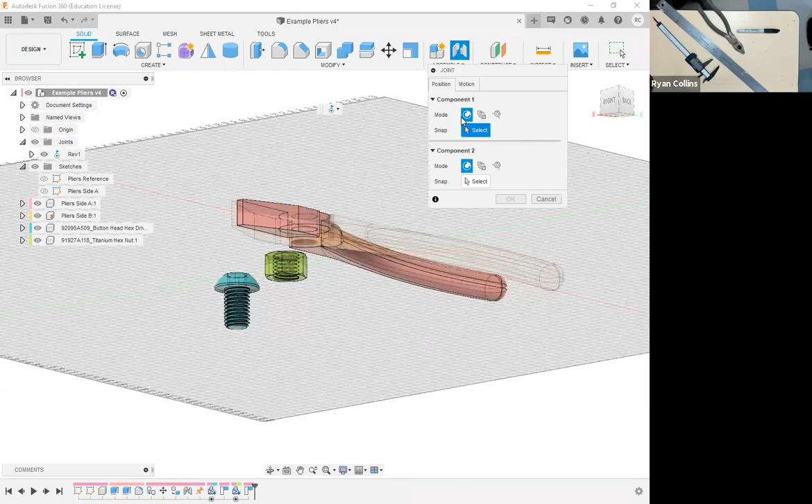So first, let's do the nut here. Again, select joint, component. I want to select what's going to move first, and then to where it will move. So I'm going to mouse over, and this is where sometimes it gets difficult, it's trying to select the threads, yada yada yada. This is why I was saying use the hold control command. Float over the flat spot, press and hold control. Now it's not going to try and select those threads, now it just snaps right in the middle.

Great. That goes out, tumble under, and I want this to snap right in the middle over here. Press and hold control, locks there. Whoop, just dropped it in there. Yes, sound effects are necessary.

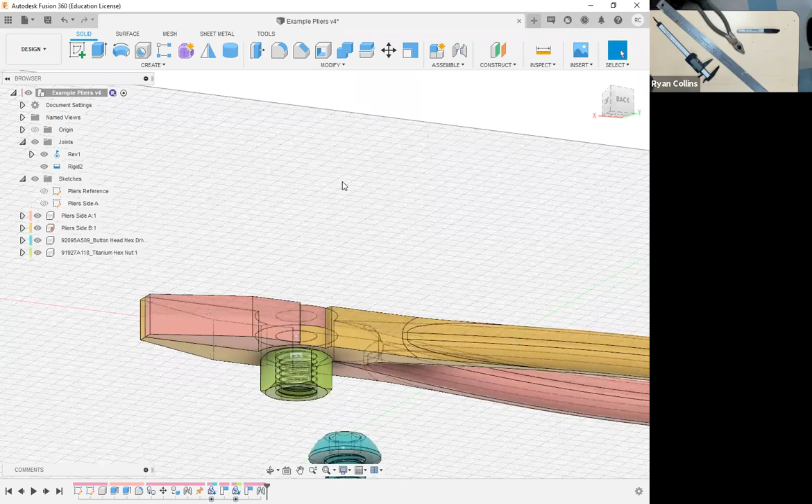I want to lock this in place, I don't want that to rotate. If you want to play around with it, that's fine, but I'm just going to use a rigid joint for this. What that does, and you see the whole thing shakes, that's showing you that it's basically glued to the parts. They're not joined like with the actual join command, they're still two separate components. The shaking kind of gives a little anxiety, but they're basically glued together. So that's a really easy way to work with that. Click OK. Please stop shaking, that's freaking me out a little bit.

Okay, now this one gets a little more difficult. I'm going to use another joint command, my motion is still rigid. I want this to snap to the top up here, but the problem is I have to select basically inside the bolt, because let me tumble under. I want this bolt to sit flush on the top of my pliers, and I can't select in there, it's literally inside. It's not in the middle of an open space, it's literally within the body of this component.

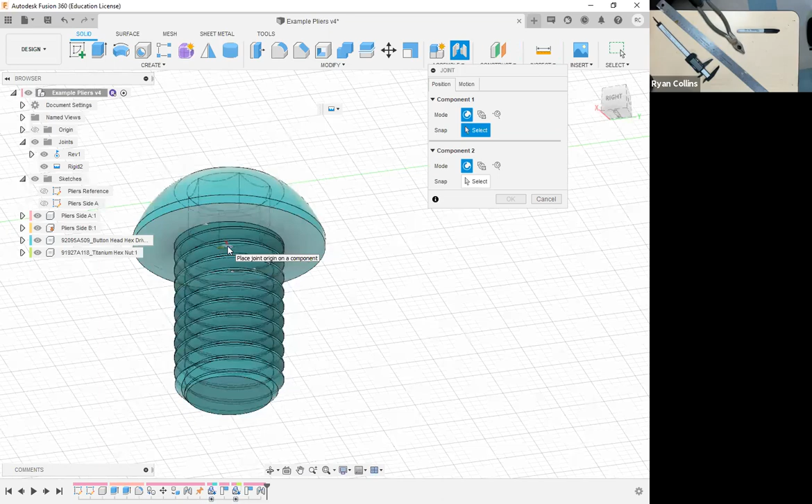But using the same thing, float my cursor under the head of the bolt here, press and hold control, and you can see the X is right in the center, it allows me to snap in there and actually select that. Now, tumble back up to the top. You can get out the X, or at least it shows, then you try to mouse over and it disappears. So this is why I keep saying use the press and hold control, makes it a little easier, and it just snaps it in place.

Motion again, that is now rigid to that part. Click OK. Great. Zoom back out.

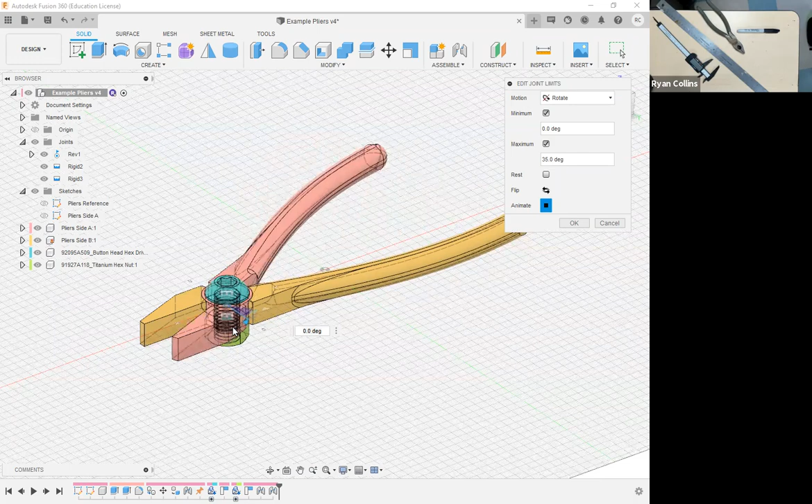Now if I just go back out to the animate again, correct, the nut and bolt are not moving, but that's all right. I'm not really registering them to anything. I just wanted you to be able to go through and see how to connect these parts together. Select OK, and there we go.

Let me go ahead and save. I'll just say hardware joints.

There we are. Okay, so at this point this is where you'd start adding in the rest of your details, or you could have done the details beforehand. Just wanted to skip over them for time's sake. So I still do need to model in like the cutter here and the ridges and such like that.

Things like the ridges, those would be best done actually within the original sketch. So just for reference, I'm going to show you how to do that real quick. Let me roll back the history slider. Oh my God, got nothing left. Back into the sketch here.

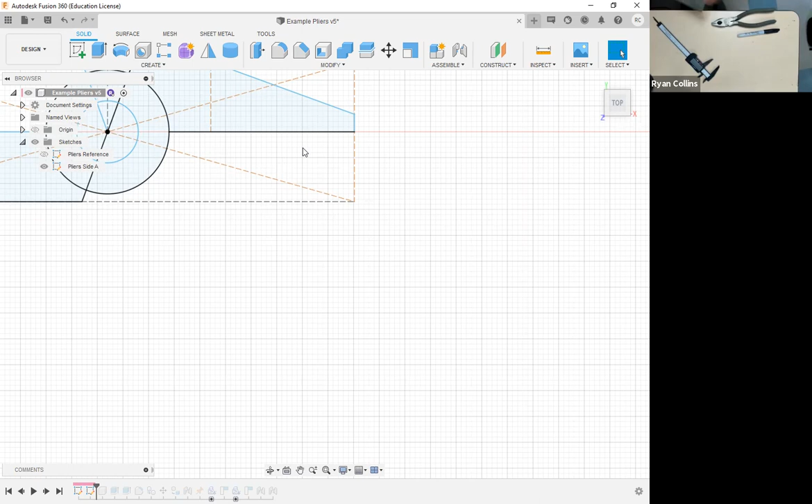And this would be a part where I could add it in separately afterwards, but honestly this would be a really easy way to do it because it's just going to carry over. So these are covering about 10 millimeters worth.

So go back into this sketch, and I'm just going to add a couple of triangles. Best thing is something like this. I would just do a basic triangle. From there, I'm going to use the rectangular pattern. I don't want to have to keep redrawing those objects. I want those two.

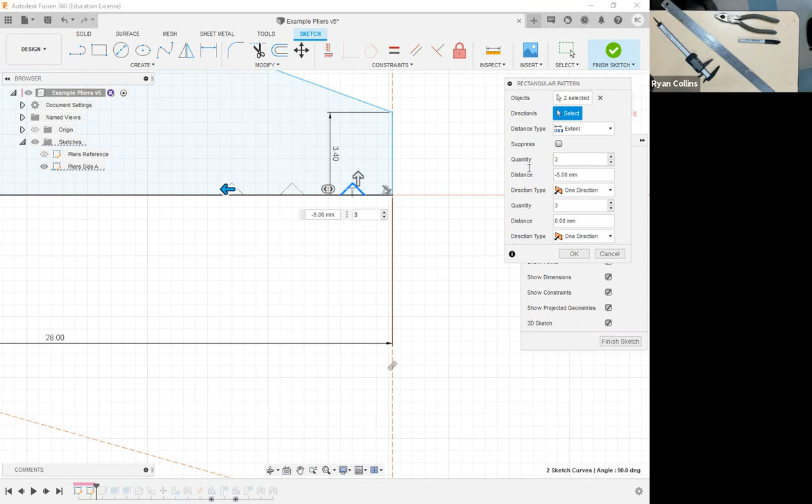Direction, going that way. And how many of these? I don't know, they're tiny. Let's say 10. And I'm just going to spread these out so that they match up.

Again, anytime you can let the program do the work for you, that's what it's there for. Just going in one direction using the command. Okay, now you might have to tweak your sketch after the fact, but let's see what happens.

Go back to current. Oh sorry, finish sketch, then go back to current. Going to recalculate a bunch of stuff.

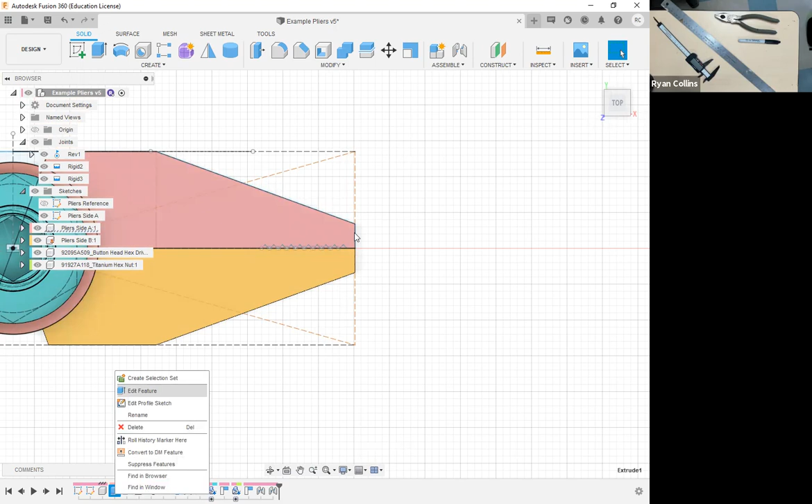All right, so what I needed to do is go back into the original extrude, edit that feature, and just make sure to deselect the little spots inside. Or better yet, what am I doing? Those two sides, easy.

Whoop, whoop. Same deal, no change other than now those sketches, or those little triangles, are built into the sketch. And I can do the same thing for the triangles in the back, but you get the idea.

Okay. Now, one problem is I messed that up when I said new body, or no, it didn't. Never mind, I still did. I forgot that I put it into a different part there.

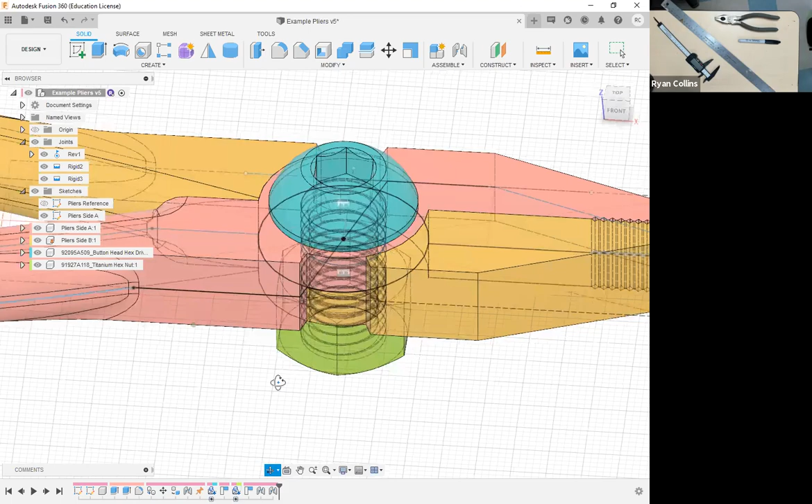Great, there we go. Model is still complete. Only now it also has those little plier ridges into them. There's still plenty more to do, but I will continue modeling that later.

So you've got the joints, your main revolute which actually moves the whole plier around. Let me hide those sketches. Great, I have my hardware installed. You can select whatever you please, of course. And those are snapped to their relative sides. It's about as close as I can make it with the tools we're using.

And I've got some features already put in, like the rounded handle, the little teeth. I still have more to add, but I'll add those after the fact. Now, just a quick reference point.

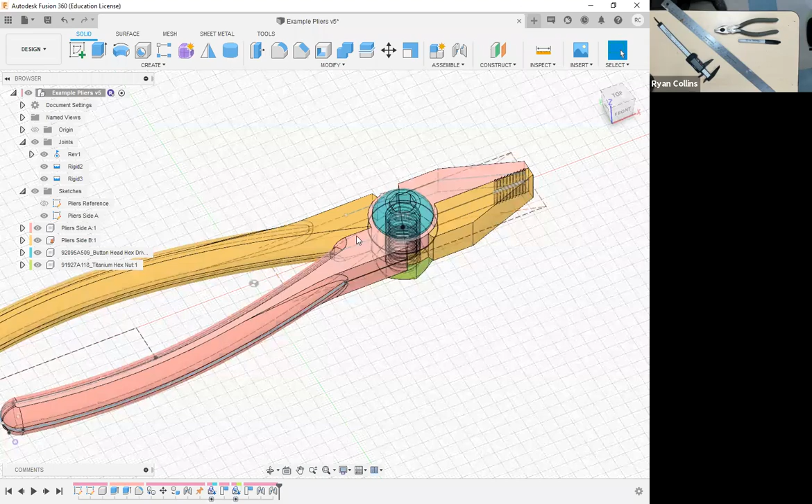Looking into the center here, look how this... oh, looks like there's a difference in the fillet. Interesting, let me change the view and it'll be a little more obvious. We'll just do shaded, or maybe shaded with visible edges only. Strangely, it did two different things.

So I'll have to go back in the sketch and see why it did that. I'm not sure why. But what I was going to say is where I added these teeth into the original sketch, I want in my model here, these teeth actually go into that fillet. So it would actually be better to add these teeth with a sketch after the model, or the fillet, is added and everything, and use an extrude cut command to slice those out.

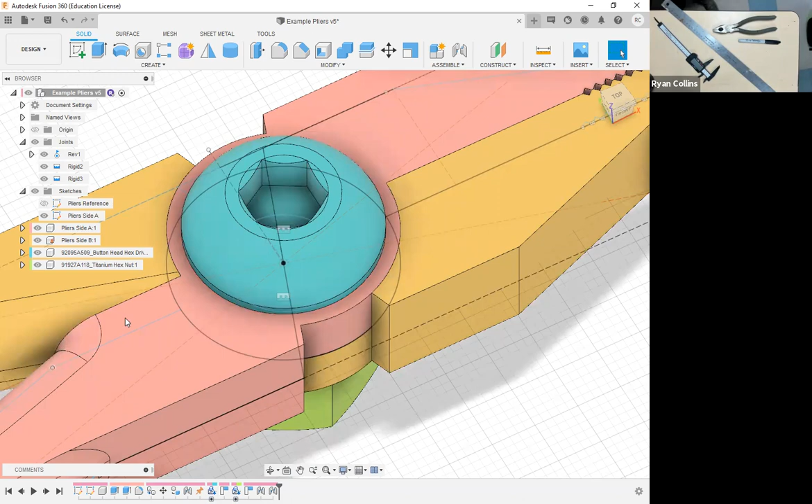And you might have to do that on both sides, but it would just be easier to do it that way. Just a point that occurs to me as I'm modeling. So there you go, that's pretty much what we're aiming for. This is one of the options.

You could do something with handles and such, or next class we're going to do an example of a lidded box that has a recess that would fit something like this. Or I think I'll make a box for the caliper.